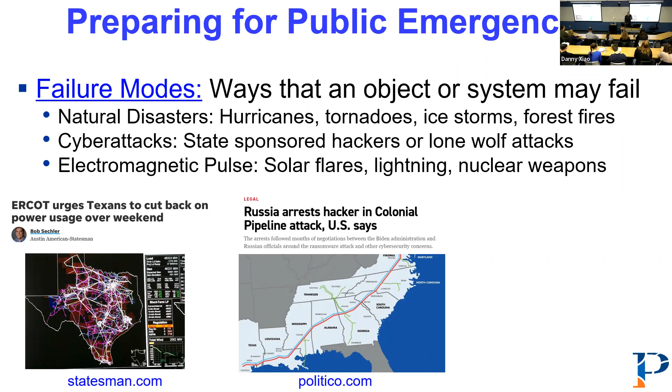But in the back of my mind, I had a concern I'd read about some 10 years ago concerning the use of electromagnetic pulses on energy infrastructure, electric infrastructure in particular, which would have a cascading effect on neighboring or adjacent infrastructure as well.

What happened at this time was I was reading ASME magazine, a publication from the Society of Mechanical Engineers, and they had done a special report on electrical grid resilience pertaining exactly to the topic I was applying for.

One of the excerpts in this publication mentioned the problems that could arise with electromagnetic interference. They're referred to as low frequency but high impact events, because despite the thought that they might only occur every 100 years or so, the impact they could have could really cause the entire United States electric grid to collapse in a matter of seconds.

You can see the quote here: they mentioned the sun has the ability to cause disruption to the power system, and it happens fairly frequently. Some of you might have heard of the Carrington event back in the 1850s or 60s, which sent northern lights all the way down to Colombia because it supercharged the electromagnetic atmosphere of the Earth.

A more pressing concern is that a rogue nation could detonate a nuclear device in the United States and take down portions of the grid. Can anyone think of a rogue nation that might try such a thing? Starts with an R.

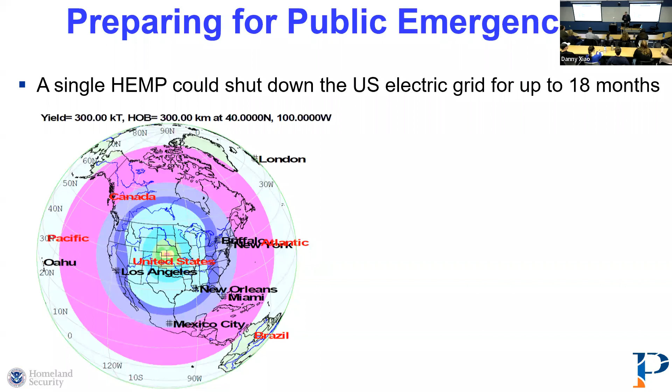Essentially, the electromagnetic pulse that would emanate from such a weapon would send out three distinct signals: the so-called early time signal, intermediate time, and late time signal.

The early time signal would disable all electronics — cell phones, computers, laptops, control stations in energy systems, and all of that. The second, intermediate time pulse, actually resembles lightning, and most infrastructure has been designed to handle that type of pulse. But then the third, magnetohydrodynamic signal, lasts on the order of a few minutes or so.

And it would actually overwhelm power lines. It would induce a current in the power transmission and distribution lines, causing transformers and all that to overload and burn out.

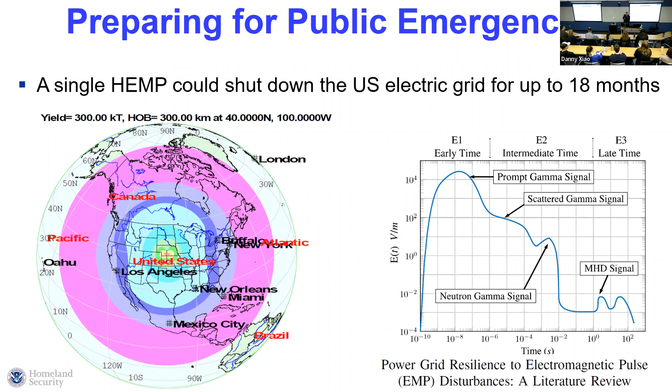I kind of use the analogy of the sword of Damocles. This is from an old Greco-Roman story about a king who was told by one of his admirers how great it must be to be king. He mentioned, yeah, it's nice to have the wealth and all of that, but there's always this sword hanging over you of adversaries who might want to take you out.

And so the prospective satellites, some of which may actually be in orbit already, are essentially a modern sword of Damocles, where the whole United States could be regarded as Damocles.

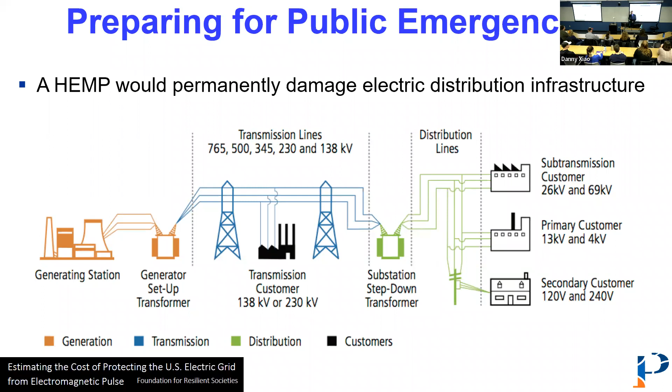A high altitude electromagnetic pulse — this is the abbreviation used for the type of singular superweapon that could knock down the United States electrical infrastructure and other portions of it as well — would essentially damage the controls in the generating stations, as well as any electronics used by end-use customers, as well as overload the power lines and blow out transformers at the generator substations and all of those things.

So this is an excerpt from one of the Homeland Security studies on the threats, you could say, to the electric infrastructure in the United States. You can see an electromagnetic pulse really takes the cake with direct permanent effects on generator stations, control centers, the internet, emergency services, transportation, water — basically the whole gamut of critical infrastructure.

Beyond that, solar storms can have similar effects. They only emit the so-called E3, or late time pulse, but nonetheless, if a modern day Carrington event were to occur, we'd experience similar impacts as that of an electromagnetic pulse.

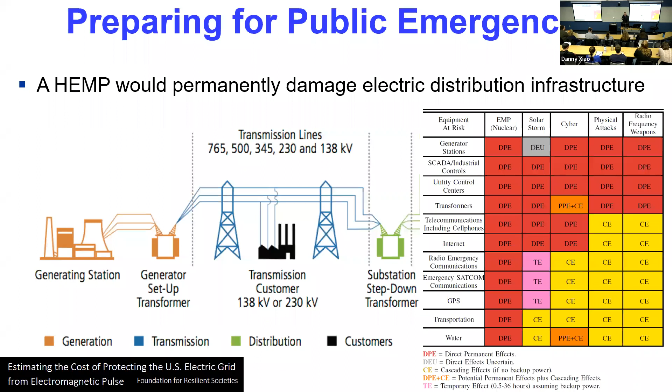Beyond that, physical attacks and radio frequency weapons are a lot more focused in the impact they could have. So as a result of that testimony in 2015 to Congress by the EMP Commission, politicians allocated billions and billions of dollars in the Infrastructure Investment and Jobs Act, abbreviated IIJA.

It's worth reading that, and you can even find the PDF and do a word search noting how many times they mention resilience in the actual Infrastructure Investment and Jobs Act. You can even see $5 billion allocated for all 50 states for these fiscal years to develop approaches to hardening and enhancing the resilience and reliability of transmission, storage, and distribution infrastructure.

Now, they're not concerned about squirrels climbing onto a transformer and causing a short out in a very localized region. This is very much in response to the testimony of those three witnesses who presented before Congress, not only in 2015 but several instances previously. So this all kind of came around at the same time.

Actually, I filed for the award prior to the approval of the Infrastructure Investment and Jobs Act. But essentially what I proposed was to enhance the resilience of the Wisconsin energy and information infrastructure against natural or man-made failures to minimize the likelihood of public emergencies. That was the goal of the award for that year from the Governor Tommy Thompson Center.

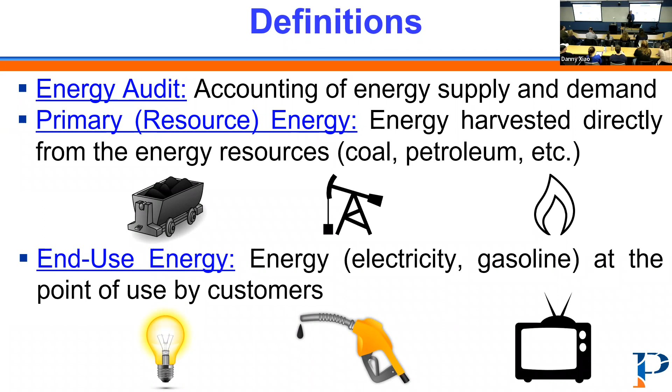And then we've got so-called end-use energy, which is the energy used at the point of use by customers. So the lights in this room, the gasoline we use to fill our cars, or electricity used to run television, laptop, all of those different things.

Then we've also got several economic sectors: commercial, industrial, and residential. You could say I refer to them as the stationary economic sectors. And then there's a fourth, fifth, and even sixth, depending on how you want to quantify them, the transportation sector. Usually you see these four stand alone in energy overviews.

But in the case of some of the information I have, at least from the Wisconsin Office of Energy Innovation, they include the agricultural sector. And I put these kind of in a combined unit because they're both associated with moving vehicles, whether it's cars and trucks and trains and airplanes, or combines and other agricultural devices that make use predominantly of petroleum-based energy sources.

And then a fifth sector, which is necessary for a robust accounting, is the electric generating sector. Essentially, that's all the electricity power generating plants within the state, or whatever region you're considering the energy audit for.

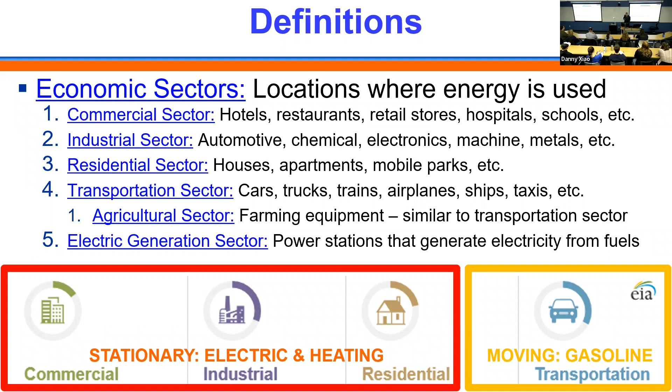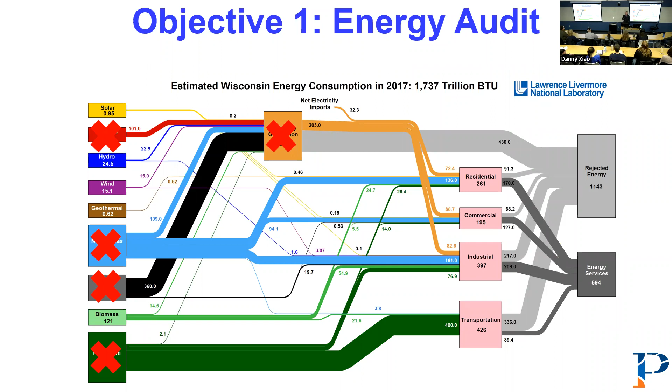Now, if for some reason the communications, information, or energy infrastructure were compromised, whether through a solar storm, a cyber attack, or even an EMP, we'd quickly lose pretty much all our fossil fuel energy sources, and it would be likely that nuclear would go out as well, simply based on the control operations of typical nuclear power plants. So what would we do? Put on a lot of sweaters and turn on the flashlights, right?

Well, in a little bit we'll see some recommendations, but I'll start with a stationary energy overview. Currently, Wisconsin has 8 primarily coal-powered plants with a total nameplate capacity of around 6,000 megawatts, providing 27.8 million megawatt hours of electrical energy in its own right.

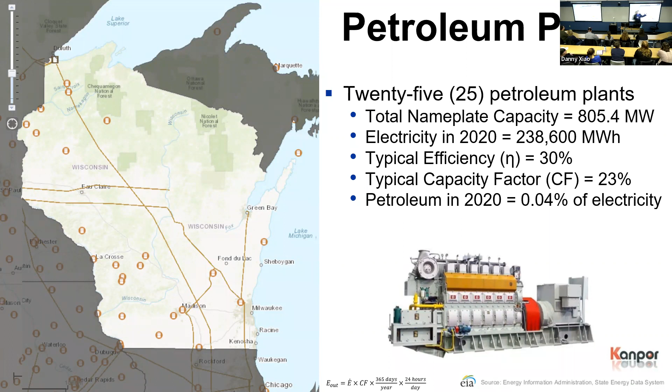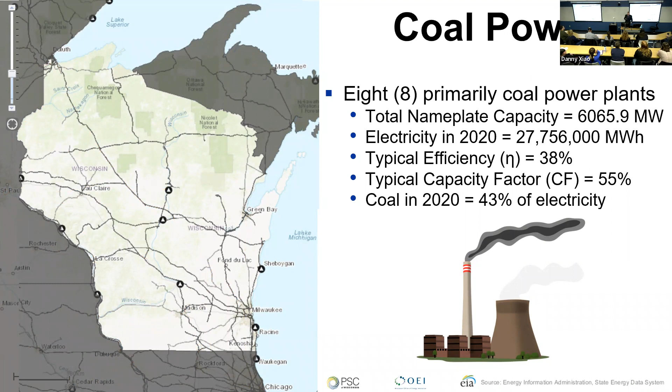We've also got a few, 25 or so, petroleum plants providing basically peaking power in the summertime. It's fairly low in nameplate capacity and fairly low in overall electricity generation, so they're not a substantial concern. But you can actually see in both these figures, these are the rail lines, which bring coal to the coal-fired power plants. If any of those were shut down for some reason, we'd of course lose the coal provided to those plants.

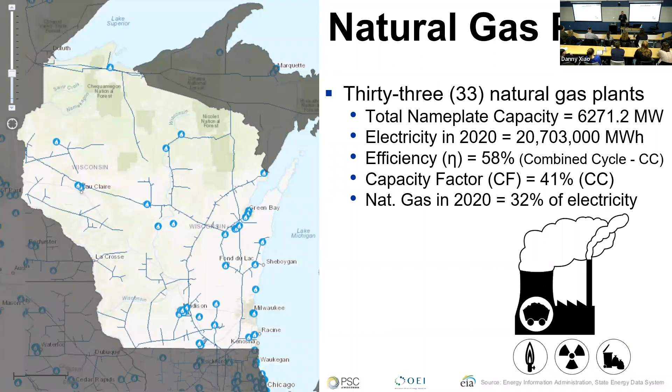Then we've got the 33 natural gas power plants, which have similar nameplate capacity to the coal-fired power plants and provide on the order of 20.7 million megawatt hours of electricity on an annual basis, which constitutes about 32% of the total electricity generated in the state.

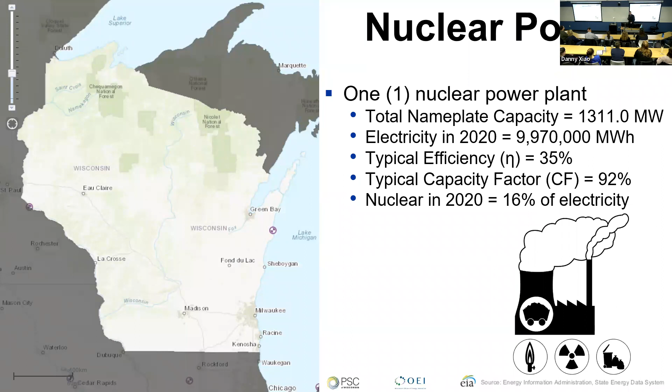There's also one nuclear power plant, 1,300 megawatts, providing 10 million megawatt hours of electricity per year. You can see it's situated on Lake Michigan to provide the cooling water needed to keep it operating at its level of performance. Now, more recently, they've developed some biomass plants.

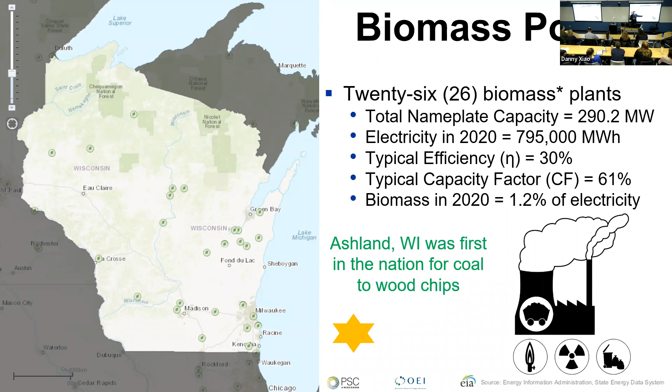I think around the Wausau area, you've got a few plants basically burning wood chips to produce electricity. Over in these regions, there's actually a lot of anaerobic digesters producing methane that is then combusted in gas turbines to generate electricity. But even so, the 800,000 megawatt hours only provides about 1.2% of the electricity needs in the state. It's worth pointing out that Ashland, Wisconsin was the first in the nation to convert from coal to wood chips, which is one of the directions I'm proposing in trying to find in-state sustainable energy resources.

Further, Wisconsin's got the fourth highest number of hydroelectric dams in the country, 58 in total, with a nameplate capacity around 500 megawatts, giving us a steady supply of around 2.5 million megawatt hours of electricity, operating at capacity factors on the order of 60 to 70%. I should point out as well, Appleton, Wisconsin was the first in the world to install a hydroelectricity plant. I learned that back in, I think, October from two hydroelectricity experts who came to campus as invited speakers.

We've also got some photovoltaic arrays. I think UW-Platteville's array is about to appear. These figures I picked up about 2 years ago or so, when it wasn't fully online yet. But even so, they only provide about 0.5% of the electricity needed, actually used in the state.

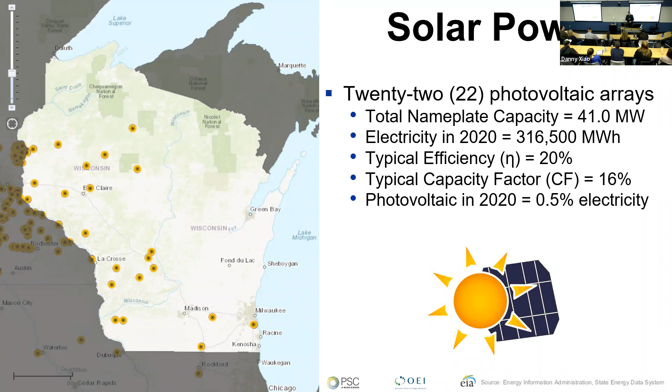And then we've also got 11 wind turbine farms. I think this is the one in Lafayette County. I used to drive by that fairly often, giving 1.6 million megawatt hours, or about 2.5% of the electricity.

Beyond that, if we were to take a high-level view of the entire infrastructure, we can look at our three stationary sectors: commercial, residential, and industrial. You can see they use a lot of natural gas. We all like to be warm in the winter, and without that natural gas, we'd all be more or less at the same temperature as the outdoors.

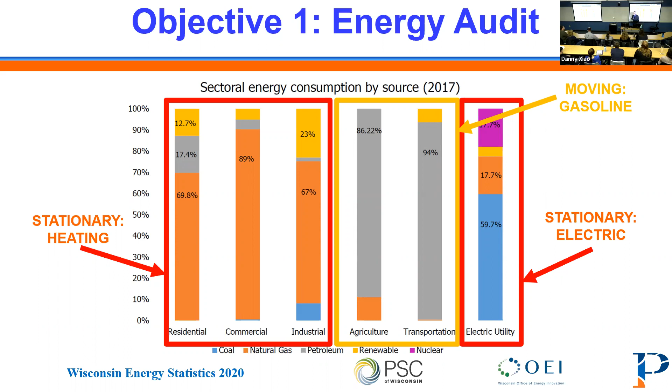Same reason, similarly with agriculture and transportation, the so-called moving sectors. They share pretty high use of petroleum products for transportation—predominantly gasoline. For agriculture, that's predominantly diesel. And then the electric utility uses a good amount of coal to this day, a substantial share of natural gas, and some level of nuclear as well. So this is, as you can recognize, an energy audit, calculating how much energy we have and how much is needed to maintain the standard of living that I think we've all come to know and love.

Beyond that, the Office of Energy Innovation has a lot of information. They've got a very robust Wisconsin energy statistics database. I think they just released their 2022 version, but I was compiling this data before the release. You can see the state as a whole uses about 3.7 billion gallons of petroleum products per year, which

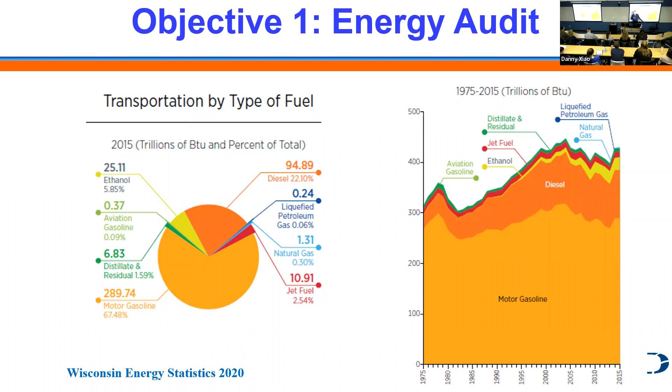is kind of typical of most states. Its breakdown shows about 400 trillion BTUs of thermal energy is used for the transportation sector. Another 15 trillion BTUs of petroleum between diesel and gasoline is used for planting and harvesting crops in the agricultural sector. Obviously, we rely quite heavily on those.

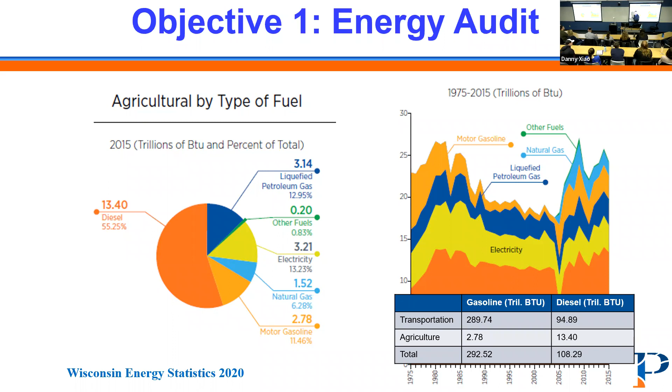Now, a little bit later, I'll be doing a recommended energy portfolio using corn ethanol and soy biodiesel as proposed replacements for gasoline and diesel, which, as we'll see in a little bit, are in limited supply as well. But from this figure, you can see the sum of these two columns, gasoline and diesel, is about 400 trillion BTUs of thermal energy, which is a little distinct from electrical energy.

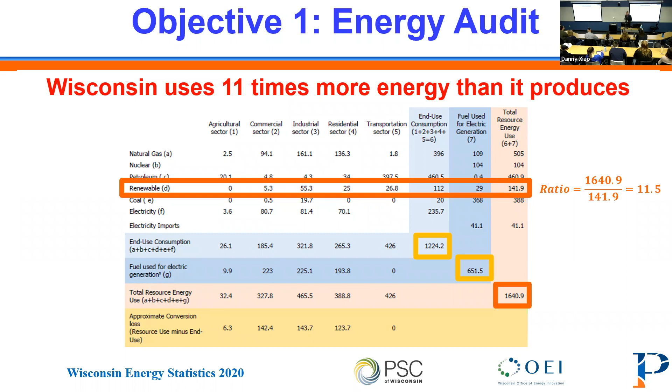So again, the Wisconsin Energy Statistics has a really nice assessment of all the in-state and out-of-state energy resources used. Here, if we look at the renewable energy column, we can see all the resource energy adds up to about 142 trillion BTUs. Meanwhile, the primary energy required by the state is of the order of 1,641 trillion BTUs. So this implies that we import about 11.5 times more energy than we produce in state. And that kind of presents a problem.

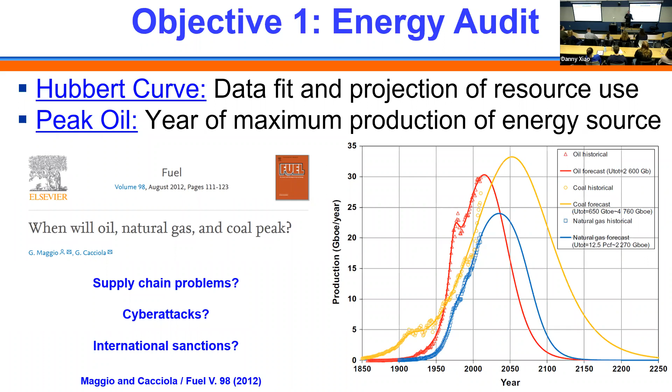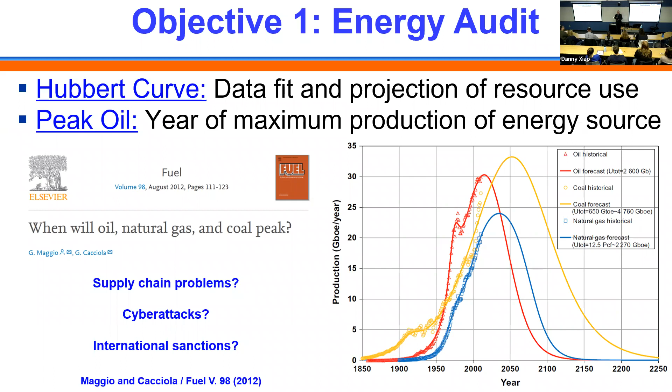But if problems were to occur, such as supply chain issues, cyber attacks like the Colonial Pipeline hack, which could have really lasted much longer, or even international sanctions, as I'm sure many of you noticed when they put sanctions on Russia, the price of natural gas in Europe spiked, and now a lot of people are deciding between warming their house or buying their food. So these are just kind of an outline of some of the concerns.

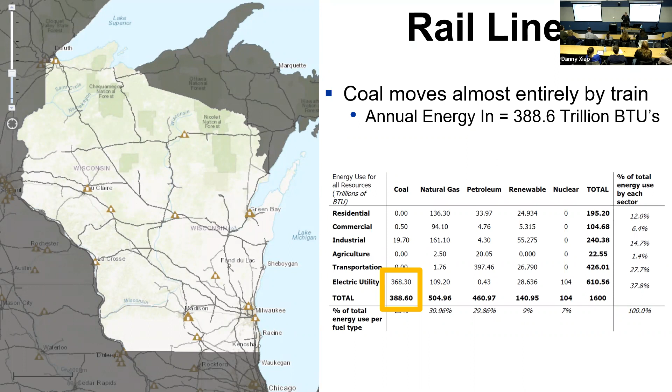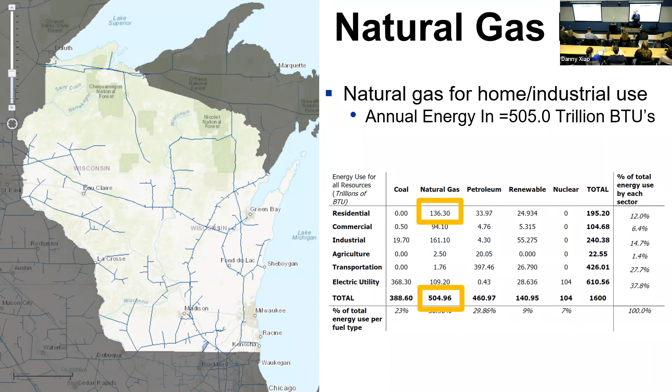So moving on from an energy audit, and I'll admit I took a very high level view. I've got a very large spreadsheet that accounts for all those calculations and numbers.

It's just a little overwhelming to present here.

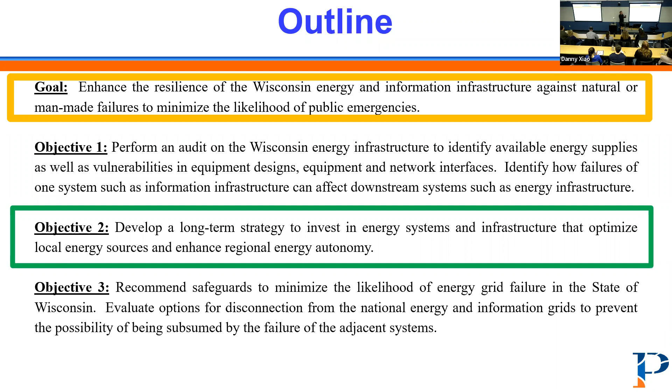Objective 2 is to develop a long-term strategy to invest in energy systems and infrastructure that optimize local energy sources and enhance regional energy autonomy. There are about 4 main natural resources in Wisconsin we can make use of: hydroelectric, multiple forms of biomass (the most complex of all), solar photovoltaic and/or solar thermal, and wind electric. My approach to optimizing in-state resources was to maximize hydroelectric, then maximize biomass, and then backfill the remaining deficiencies with solar and wind. I'll outline this process and briefly mention our nuclear opportunities as well.

1,600 trillion BTUs is around 480 million megawatt hours. Breaking that down per capita, dividing 1,600 trillion by 5.8 million people, we find about 83 million watt hours of energy used per person per year. This is a combination of thermal energy, home heating, and electrical energy for charging cell phones and such. I converted those to joules to check my calculations, and it turns out Wisconsin is right in line with the rest of the U.S., at around 300 billion joules per person per year. I was also curious about average power use per citizen, and it's right around 10,000 watts, or 10 kilowatts, taking that energy divided by the number of seconds in a year.

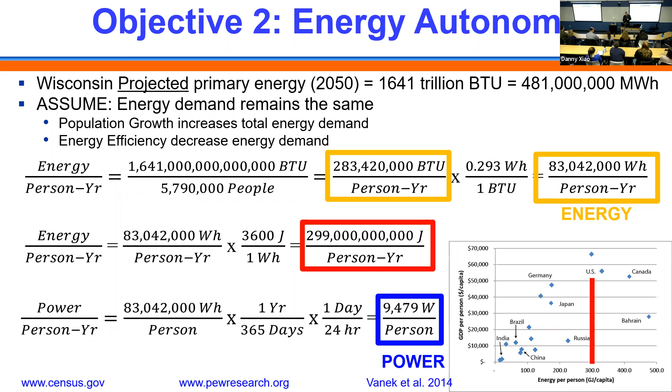Currently about 8.6% of all Wisconsin energy sources are renewable. The vast majority of that, about 70% or so, is actually wood - the lumber and timber industry up north burning wood for electricity generation, and possibly some people using wood chips for home heating. Of that 8.6%, 19% is ethanol, since we're in the corn production region that leads to ethanol production. Beyond that, a good chunk is hydroelectric and wind, with a tiny fraction of solar, at least as of 2017. I used somewhat older data because Wisconsin Energy Statistics data came from 2017, but things have changed in the past 6 years - though it's more or less the same.

In recognition of diminishing fossil fuel supplies and concerns over health effects of fossil fuels, Governor Evers recently issued Executive Order 38, advocating a transition to clean renewable power by 2050, with a goal of attaining 100% carbon-free energy. I want to point out that $12 billion per year is sent out of state to purchase fossil fuels - coal, oil, and natural gas. There are no fossil fuels that occur naturally in Wisconsin, so we start at a disadvantage trying to obtain energy from in-state resources. One goal of this 2019 order was to develop a clean energy plan based on the recognition that fossil fuel supplies would diminish.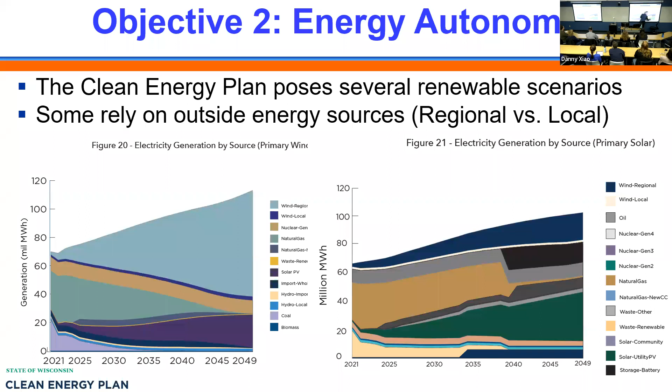They proposed two main energy portfolios. One is predominantly wind - this big blue section suggests regional and local wind, with a diminishing of coal and natural gas, shrinking natural gas to nothing by 2050 and coal to nothing by 2035 or so. Another figure shows a similar layout but primarily solar, where this green area represents installed solar capacity. I took that as a guideline and looked at other information, such as Princeton University's net zero carbon initiative, which laid out several energy portfolios for different regions of the country.

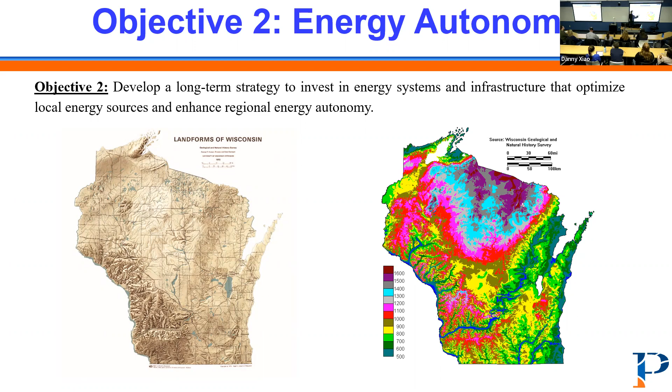Let's start off with hydropower. We already saw the 58 hydroelectric plants provide about 2.5 million megawatt hours of energy every year, all in electricity. I wanted to see if they had been saturated, that is to say maxed out, or if there was opportunity for more, so I started looking at topographical maps and various maps of the state.

I came across a very valuable document, the New Stream Reach Development, Comprehensive Assessment of Hydropower Potential in the United States, conducted by the U.S. Department of Energy. It was like the diamond in the rough I was looking for, a way to quantify it or have official numbers to back up some calculations. Essentially, they divided the United States into several different subbasins.

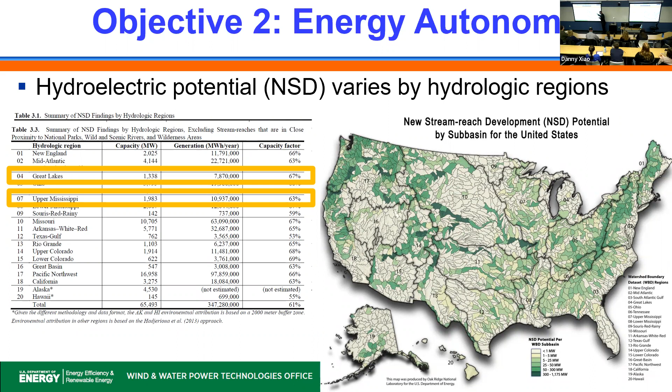Here we see subbasins 7 and 4 straddle Wisconsin, so we'll look at those in greater detail now. The Great Lakes subbasin covers the northeastern portion of the state, and the darker green areas mean greater hydroelectric potential for that region. Here we see a little limited area in the northeast corner.

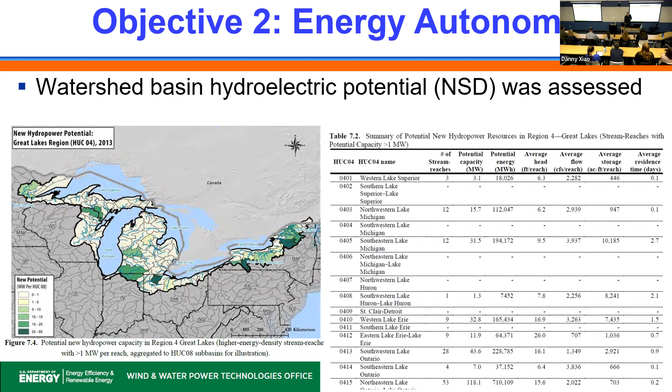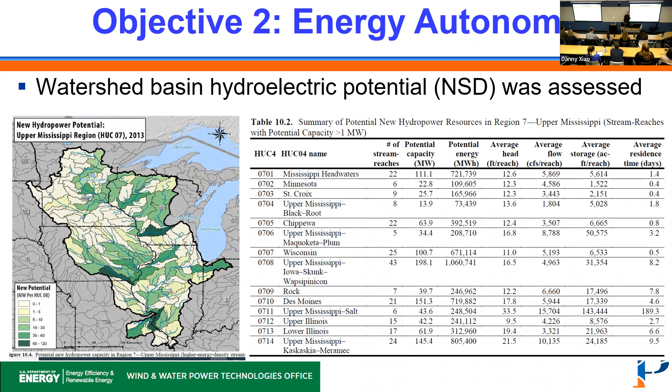For the upper Mississippi region, we see a greater number of green regions, but it's really only this last leg of the Wisconsin River that offers the most potential. So looking through, I found that Wisconsin, at least in theory, has the ability to gain an additional 3.5 million megawatt hours of hydroelectric power.

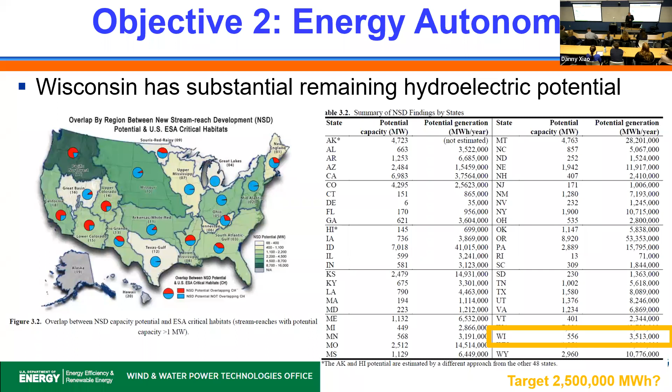At the time, I proceeded with the assumption that it might be realistic to attain 2.5 million megawatt hours, because not a lot of people are going to want you to dam up their river and flood their backyard. I later learned from two regional hydroelectric experts that even 2.5 million megawatt hours is a pretty tall request. So I've kept my numbers the same, but in reality this would be somewhat formidable to accomplish.

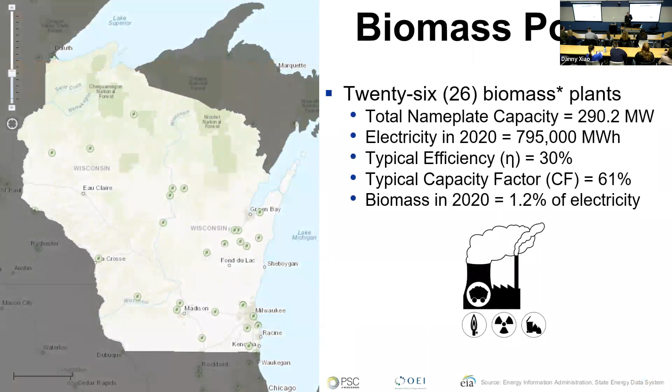So as I said, we'd max out hydroelectric and then biomass, so now we'll move on to biomass. Biomass was really the most complex of all four energy categories. On the one hand, we've got the 26 biomass plants in the state, but they're not necessarily representing all the energy potential that's out there.

When I first looked at this, I found this Wisconsin Forest book, and it said 649 million dry tons of wood is, at least in theory, present in Wisconsin. I wondered how much energy could be extracted from that at a sustainable harvest rate, so I proposed something of the order of 100 years, 649 million tons over 100 years. That is to say, don't cut down anyone's beautiful oak or anything like that, but if it dies, make it into wood chips and send it through the coal fire power plant.

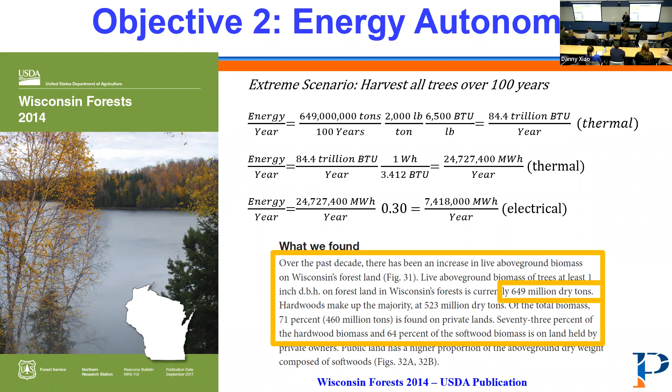Going through the calculations, I found like 84.4 trillion BTUs of energy would be available at that sustainable consumption rate. If it were converted to electricity, something of the order of 7.4 million megawatt hours might be attainable through that method. But I later found a more useful reference, this Wisconsin Strategic Bioenergy Feedstock Assessment, which is a really great publication in its own right.

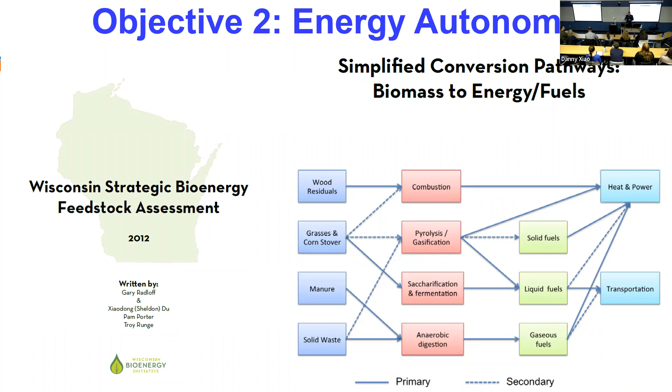They do a pretty robust coverage of bioenergy potential, showing 4 main categories: wood residuals, grass and corn stover, manure, and solid waste, and then several candidate pathways, simplified conversion pathways, to convert it either into transportation fuels like ethanol and biodiesel, but in this case not from those crops, or combined heat and power. Power denotes electricity, and heat is given off in the process as well. So they propose several pathways, and the solid lines represent the more efficient pathways to pursue.

And they have several recommendations. In the interest of time, I'll just buzz by those and point out the figures they provided here. So on the one hand, we've got industrial roundwood, so-called harvest residuals, and then additional roundwood.

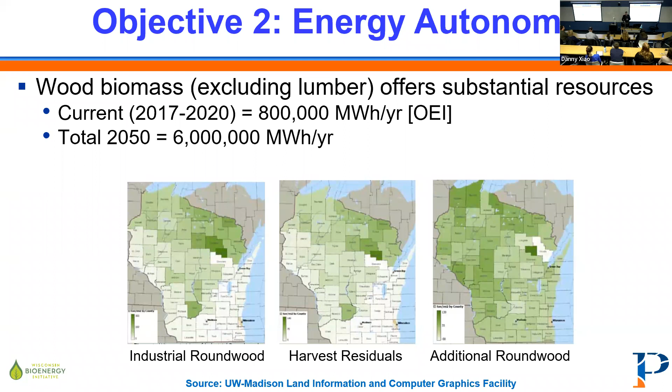This would be regarded as high value material, so it's not really for consideration for biomass energy. But the harvest residuals denote the bark and the branches and the tops and things like that, that could, at least in theory, be turned into wood chips and burned for electricity or for thermal energy.

And then further south in the state, we've got corn products. So corn stover is pretty much everything except the corn grains, which can be pelletized and burned and converted to electricity or used for heat. We've also got conservation, restoration, and prairie grasses shown in these regions here. And then, of course, dairy manure associated with the dairy ring there.

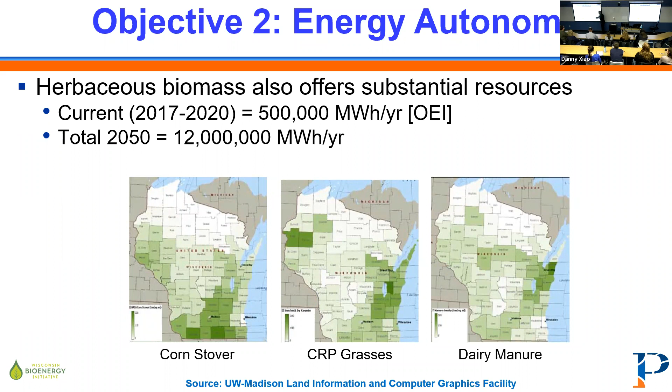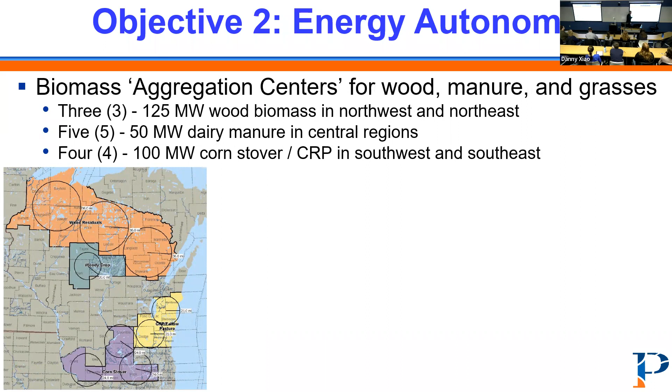So they did a good compilation, I would say, of the various resources. And they even proposed how it is that we could supply a good portion of thermal energy or electric for the northern third of the state using wood residuals, and then some combinations for corn stover and conservation, restoration, and prairie grasses shown in the lower portion of the state.

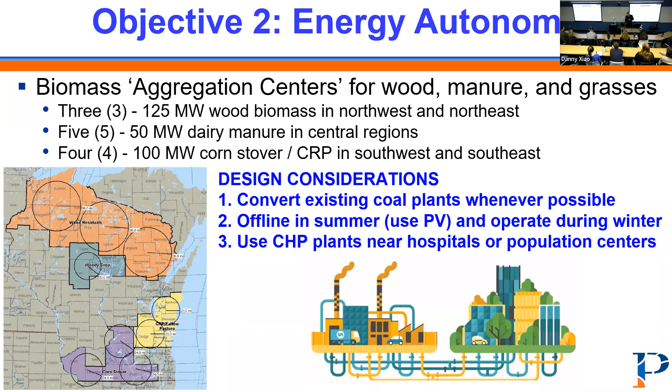And just to lead into some recommendations you'll see in a little bit, things that could be considered: convert existing coal power plants to wood chip power plants whenever possible, put those offline in the summer and design enough photovoltaic and storage to cover electric needs in the summer, then use the wood chips in the winter, and use combined heat and power, CHP, plants near hospitals and population centers whenever possible.

So this is, in essence, a proposal to squeeze out as much energy, or to use energy as efficiently but sustainably as possible, to at least have backup power in the event of a public emergency, right? All in keeping with the goals of the Tommy Thompson Center.

So here's the table of data from a variety of sources: roundwood, wood harvest residuals, wood, all of that. I divided it into thermal energy, and I used the metric units of megawatt hours and the US customary units of BTUs for these categories, but they're essentially just different units of the same magnitude or same numbers.

And then I've hypothesized at least that this thermal energy could be converted to electric at about 30% efficiency. So these columns here represent metric and US customary units, which are essentially these columns multiplied by 30%. By the way, this is the energy content listed for wood products, herbaceous products, and then lower biogas products as well.

And it's worth pointing out that it looks like a maximum of 221 trillion BTUs of thermal energy could be obtained from biomass. We already extract 100 trillion BTUs, so it would only be an additional 120 or so trillion BTUs of thermal energy.

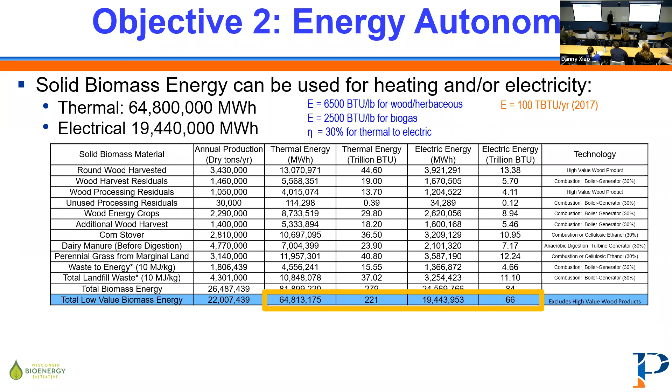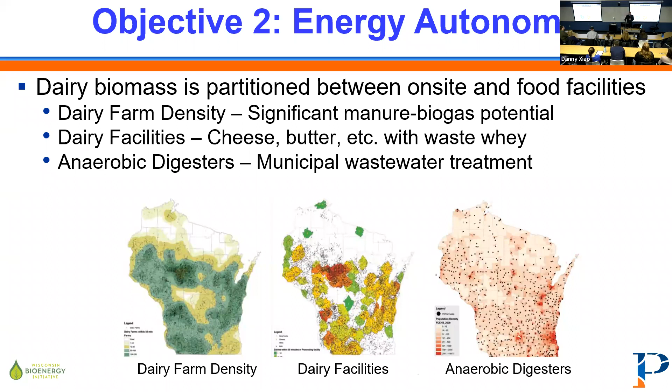So it's just a show of three parallel figures, three parallel sources, you could say, of biomass energy that might be delivered to existing wastewater treatment centers to try to push them up to a critical level whereby they can generate at least maybe roughly half of the electricity needed to actually operate the facilities.

So wastewater treatment plants are critical infrastructure. They're the unsung hero, you could say, of day-to-day life by preventing waterborne illnesses, the scourge of the 1700s, and also treating millions of gallons of water per day. And I think if anyone's from civil and environmental engineering, they fully understand the value of wastewater treatment centers.

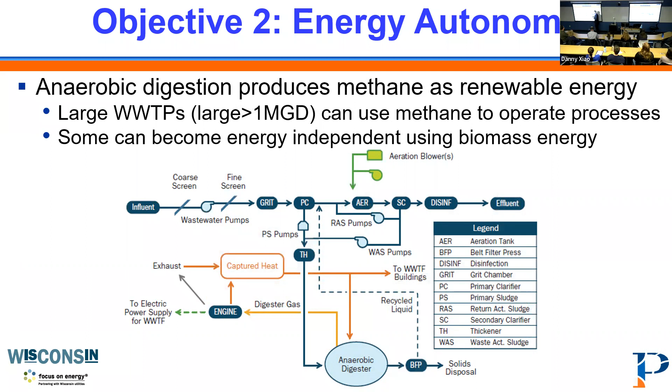The larger wastewater treatment facilities that process more than 1 million gallons per day can actually close part of the loop in their operating energy requirements by using anaerobic digestion gas to run a combustion engine, provide electricity for the wastewater treatment center, and also capture heat, which can be used in some of the biodigestion processes.

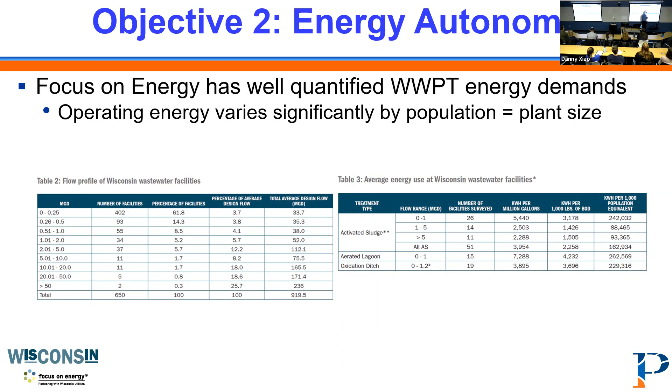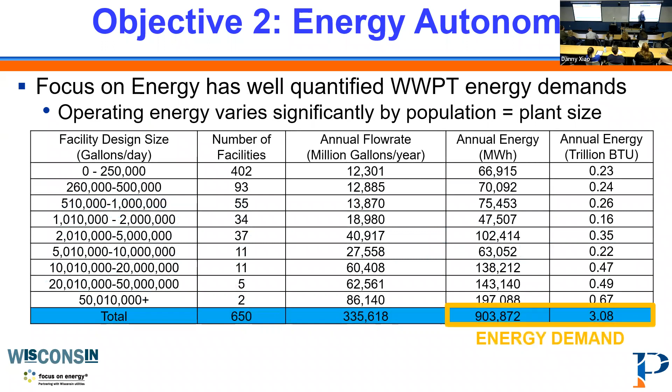So I did an assessment of the 650 different wastewater treatment centers and the typical energy per gallon of material processed, and worked through some of the calculations. It turned out the energy demand for all 650 facilities is on the order of 904,000 megawatt hours, or 3.08 trillion BTUs.

But the 88 largest wastewater treatment centers actually have anaerobic digesters and electricity generating systems where they can generate on the order of 438,000 megawatt hours of electricity. So this covers about half of the energy needs for all of the wastewater treatment centers in the state.

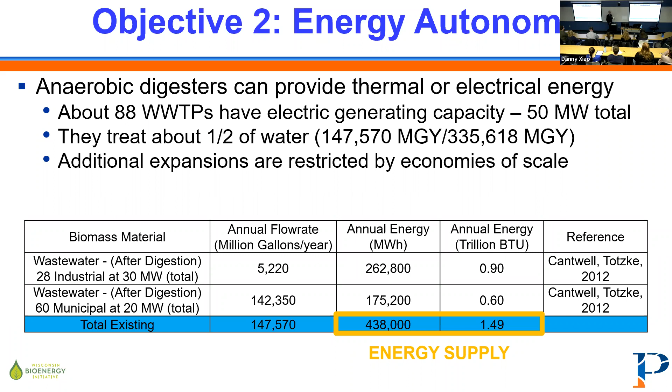And going back to the figure of the dairy farms and the dairy processing facilities, if some of those materials could be directed to some of the existing wastewater treatment centers, we might bump this number up to 600,000 and increase, you could say, the resilience of wastewater treatment centers in the state.

Now moving on to biodiesel.

Anyone from a farm family in the room? Good, yeah. Proud to be one, right? This actually may be kind of good news, at least if it's taken up at a state level.

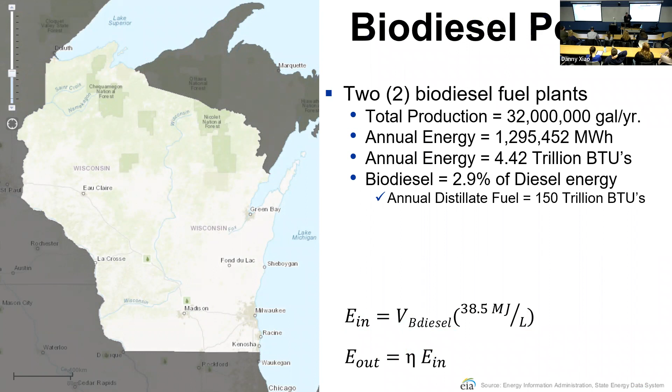So currently there are 2 biodiesel plants in the state, and there are 9 corn ethanol plants in the state, producing on the order of 572 million gallons of ethanol per year.

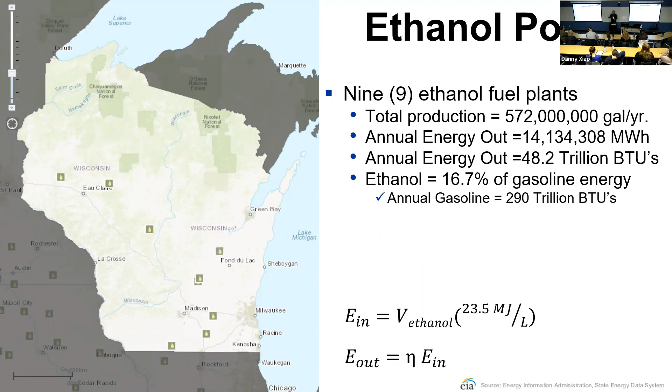And I was curious, if 1 bushel of corn can produce 2.7 gallons of ethanol, can all the corn in Wisconsin, if converted to ethanol, which is unrealistic, provide all the transportation energy needed within the state? And similarly, if every bushel of soybeans produces 1.4 or 1.5 gallons of biodiesel, would that be sufficient to meet Rudolph Diesel's dream of farmers providing their own agricultural energy?

So I went through, multiplied the yield by the fuel ratio, by the specific energy, determined the volume of fuel that could be produced and the thermal energy content that it would have.

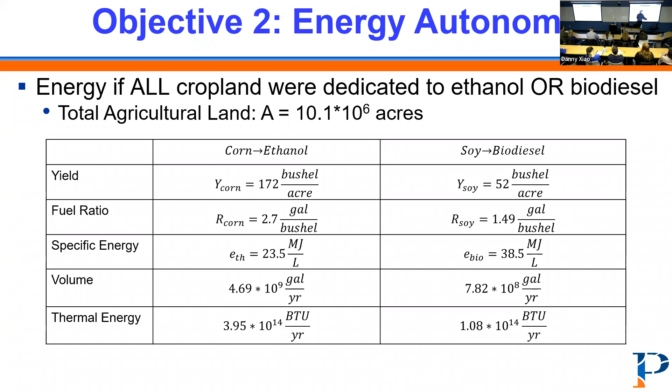And it happens that if all 10.1 million acres of farmland in Wisconsin were planted with corn and all of that corn were converted to ethanol, then yes, we could provide all our gasoline needs with corn ethanol. In contrast, if all 10.1 million acres were planted with soybeans, it turns out we could also satisfy our agricultural needs and a portion of our transportation needs.

So this is the existing thermal energy content of ethanol and biodiesel in the state, and these are the existing demands: 300 trillion BTUs of gasoline, 108 trillion BTUs of diesel for both transportation and the agriculture sector.

If it were all planted as corn converted to ethanol, we get about 400 trillion BTUs, which would exceed the necessary gasoline in this case. And if it were all planted with soybeans, we'd get 108 trillion, which would just meet the existing diesel needs.

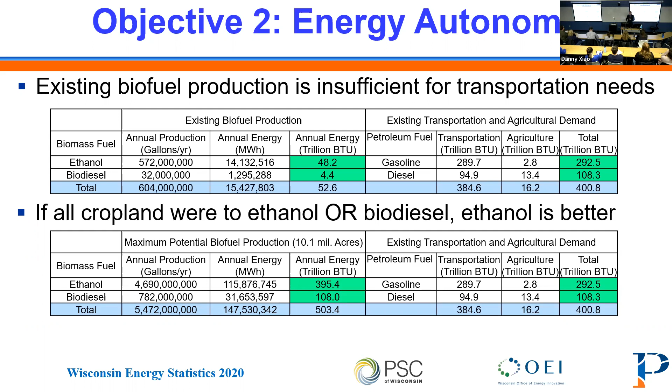So currently all our diesel, or a good chunk of it, is bought from petroleum industries. But my proposal, at least given the current production methods, would be to use half the land for corn to ethanol, half for soy to biodiesel. I realize that's entirely unrealistic.

The holy grail, so to speak, of ethanol production is herbaceous materials - that is to say, cellulosic ethanol, using things like corn stover and leaves and other materials like that, rather than valuable food products.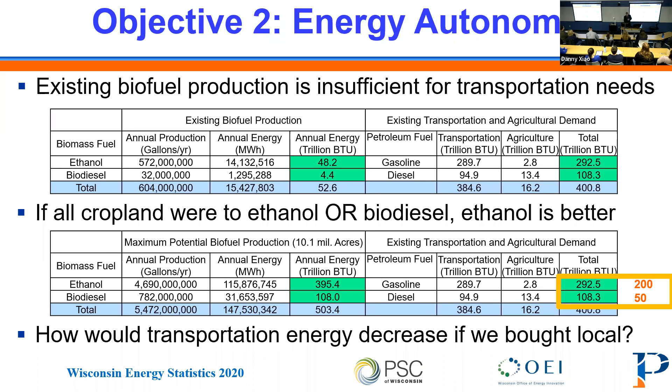Let me just kind of buzz through the rest of this, just so I don't keep anyone here too long. So from here, we see we need 1,224 trillion BTUs of energy to maintain the standard of living in the 4 economic sectors shown there.

And so I did basically an audit, an energy balance of the Wisconsin energy infrastructure. Here's the 1,224 trillion BTUs needed for end use for our current standard of living. 235 of that is accounted for in electricity, and the remaining 988 trillion BTUs is needed for thermal energy, keeping our houses warm, our grocery stores, our industries, our schools, and all of that warm.

I separated this into thermal energy and electric energy, again using both metric and US customary units. I added in the energy output of the one nuclear plant, the aspired value of all the hydroelectric plants, the existing 2.5 million, plus the others.

Then I partitioned the 64.8 million megawatt hours of biomass energy in half, so 50% remains thermal and the other 50% becomes electric at 30% efficiency. Beyond that, I included the proposed ethanol and biodiesel supply at 200 and 50 trillion BTUs.

Basically what I ended up with was a deficit at the bottom, and I proposed the remainder be covered by solar and wind. That's how I ended up with a total deficit of 228 million megawatt hours, which I evenly split between solar and wind.

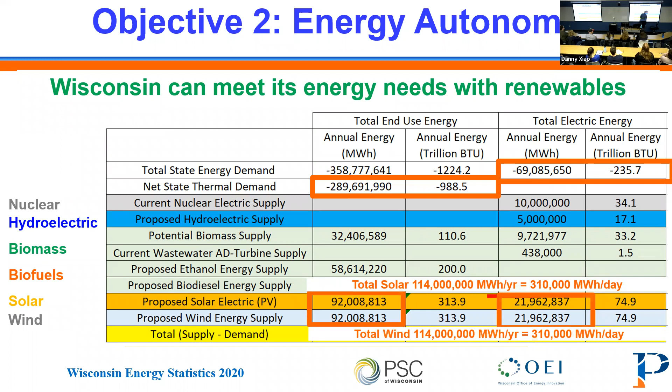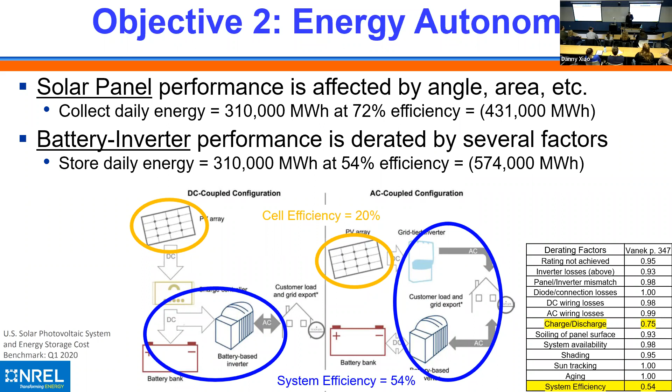I calculated that cell efficiency is on the order of 20%, and all the inverter, charge, and discharge losses can amount to on the order of 54%. So if we need 310,000 megawatt hours per day at 72% efficiency, the panels would have to collect 431,000 megawatt hours. Likewise, if we wanted to store that in batteries overnight, they'd actually have to collect 574,000 megawatt hours. That's a pretty formidable lift in its own right.

I tried to size a photovoltaic system with storage based on the UW-Platteville 2.4 megawatt system over in Memorial Park, which cost $3.4 million. I used the land spacing ratio to get the total panel area, then the total land area that would be occupied, and then the total cost. $365 billion is a pretty steep price, I'll be the first to admit.

Based on the size and spacing ratios, if all of those were put into one solar field such as the one in Memorial Park, scaled up to 570,000 megawatt hours, we'd need this much space for 570,000, this much for 310,000, plus $871 billion. Let me jump through for wind here as well. I do try to put it into context at the end.

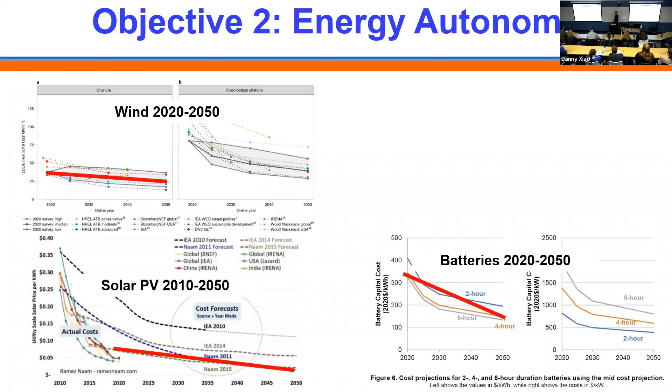So the last bit is projections of energy costs. Here we see stable wind energy cost from 2020 to 2050 - I used that red line to project the data. Here we see solar photovoltaic costs from 2010 to 2050. They actually ended up much lower than the original projections, but I used that to estimate the projected cost as well. Likewise, battery storage is expected to experience a substantial decrease in cost.

So I projected it out for 25 years, from 2025 to 2050, suggesting that we'd buy 1/25 of our solar and wind every year for the next 25 years until the full portfolio were built up. I also show the projected cost of fossil fuels over that time frame, and you can see around 2043 or so, it'll cost more to keep firing the coal plants and natural gas plants than it will to build solar photovoltaic with energy storage.

I want to point out, on one hand, the fossil fuel figure represents money that will go out of state no matter what. The green lines here represent solar and wind investments that may or may not go out of state. If Wisconsin had solar photovoltaic manufacturing like Minnesota does - they've got a big solar panel factory there - or if they built wind turbines in state, this money wouldn't even leave the state.

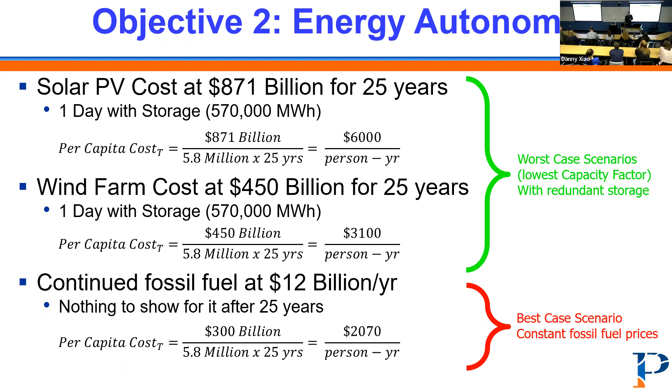But at least the projections are that it would be a sensible investment, albeit we wouldn't really see the parity of investments until the mid-2040s or so. So it's hard to persuade people to make an investment that they don't see a short return on. But nonetheless, given the limitations in fossil fuel supplies themselves—I've got that on the next slide—at some point, whether it's 2040 or 2050 or so, these prices might get outrageous, with the exception of coal.

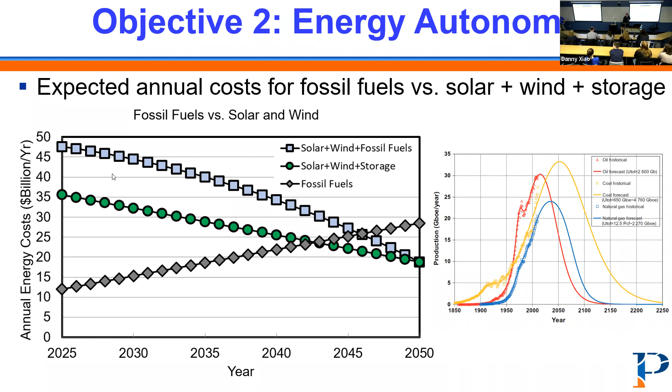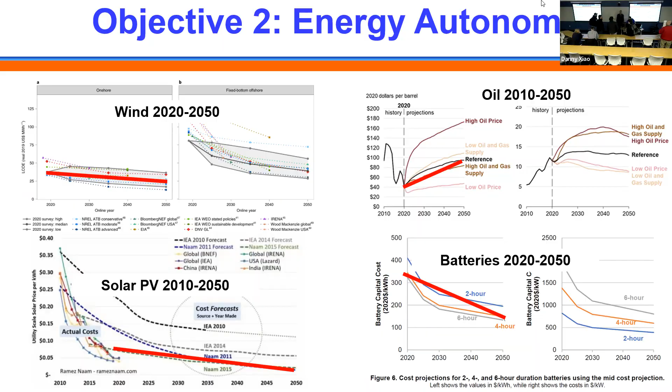Yeah, and the hope would be that eventually once you saturated your utility market, you'd have recycling facilities that could further lower the cost, because you don't have to get all the rare earth elements needed to induce the photovoltaic effect. My hope would be that Wisconsin could recognize that if they built solar and wind industries, they wouldn't be sending all that money out of state. Is there a wind manufacturing facility in the state? I don't think there is, but they've got the ability, they build big ships, 1,000-foot Lakers over on Lake Michigan, Marinette Marine.